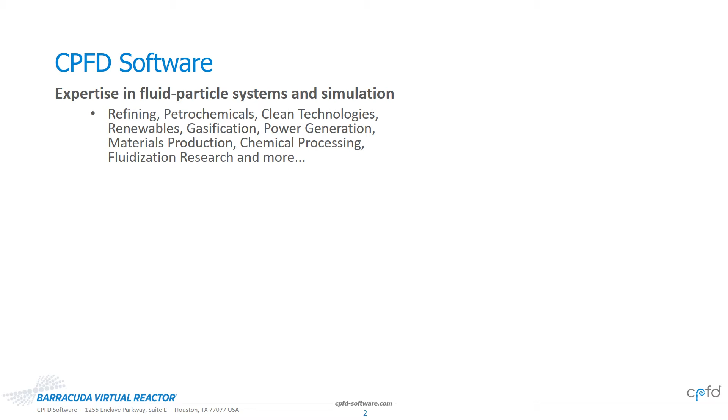Our expertise is codified in a product, a software product named Barracuda Virtual Reactor. Virtual Reactor models the gas particle hydrodynamics, thermal behavior, and chemical reactions in industrial units.

This is award-winning software technology. We have received multiple highly commended designations from the Institution of Chemical Engineers, the IChemE, and most recently won Hydrocarbon Processing's Best Software Technology in the 2020 HP Awards.

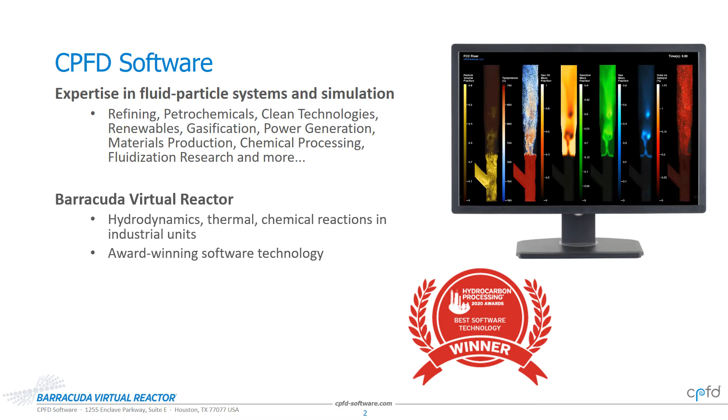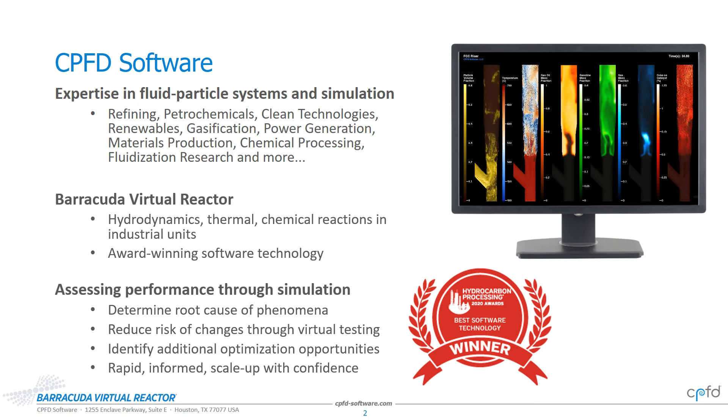And the way it's used is to assess performance through simulation. Like most simulation technologies, it can be used to determine the root cause of the underlying phenomena behind what's happening. But what's really exciting here is this is doing so in units that are typically running 24/7, often for years on end. And so making changes can be extremely costly, and we reduce the risk of those changes through virtual testing. Invariably, what happens is we identify additional optimization opportunities, and ultimately, this enables our clients to do rapid, informed, scale-up technology development, IP protection with confidence.

So, how does simulation speed affect our clients? We're going to talk about speed up. Conventional wisdom, and it's certainly true, is that accelerated simulations, and in our case, GPU accelerated simulations, take less time to complete. Absolutely true. So consider 100x speed up, and we're going to show that and more.

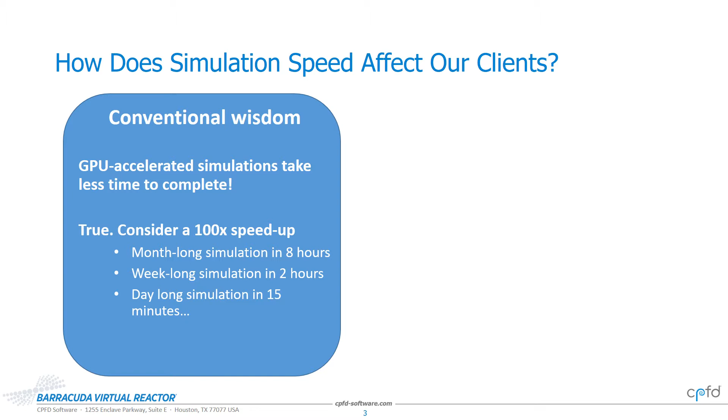What does that mean? Well, it means a month-long simulation's done in 8 hours. A week-long simulation's done in 2 hours, and a day-long simulation takes 15 minutes. And that's certainly true. But practically speaking, with our clients, we've observed something else. Really, a practical outcome that we've observed is that the GPU accelerated simulations are really making the impossible possible.

And to illustrate this, we're going to dig into a case study. This is with a client company of ours, ThermoChem Recovery International USA. We're going to call them TRI for short. They're doing some super exciting things. They have a technology that converts trash, literally municipal solid waste, into jet fuel. And we're going to explore their digitalization journey, which has really been enabled by our GPU acceleration.

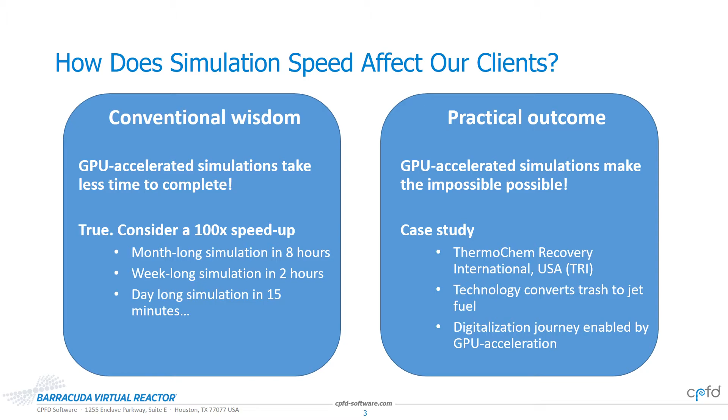Well, let me introduce TRI to you. TRI creates technology that produces green renewable fuels and chemicals from a variety of feedstocks. Here at the bottom, I'm showing various biomass sources. At the top, we have waste that would otherwise be sitting in a landfill.

And TRI's technology, I'd say, is marked by two things, characteristics. One is very high feedstock flexibility, which enables the use of the lowest cost feedstock, not just in terms of dollars, but especially considering the overall environmental footprint when you consider things like transporting the feedstock to the biorefinery. It's also marked by a very high carbon conversion and efficiency. So really, their mission is sustainable economics with minimum overall environmental impact.

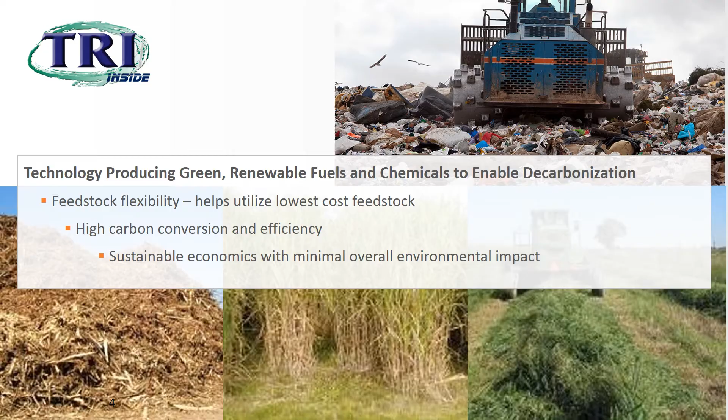And it works. Here are samples of various fuels and other products created using their process, their technology. We have jet fuel, diesel, various waxy products that were created using the woody residuals, as well as municipal solid waste or MSW feedstocks. And these are drop-in fuels for strategic domestic markets.

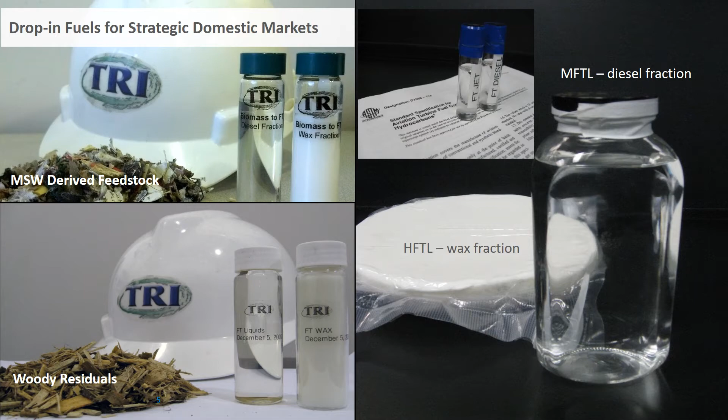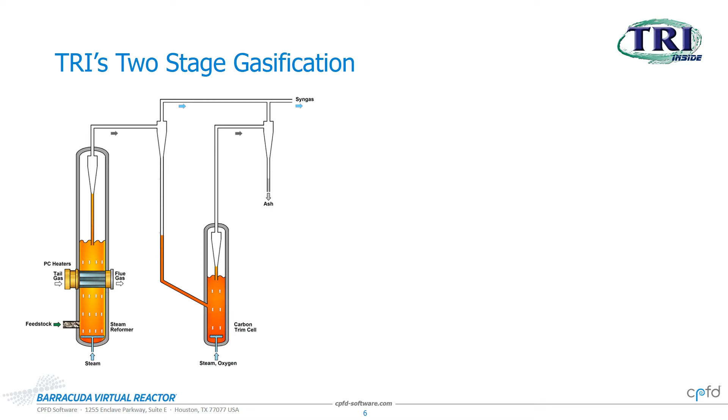On the left I'm showing a deep bed—actually there are two fluidized beds here. On the left is the steam reformer, indirectly heated by a proprietary, unique pulse combustion system. On the right is a carbon trim cell.

This sits in an overall biorefinery process. The entire thing has been demonstrated at a process demonstration unit, or PDU, in North Carolina, including all components: the feed system, the steam reformer, the carbon trim cell, various gas cleanup units (GCUs), and a Fischer-Tropsch synthesis unit.

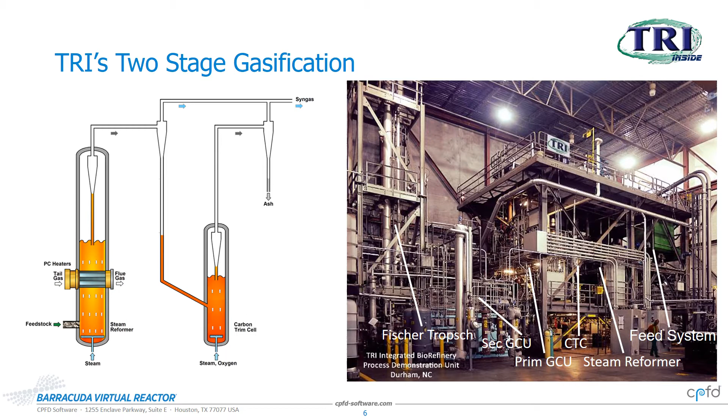So how do you take a unique idea and commercialize it? What are the complexities involved here that would benefit not only from digitalization, but from GPU acceleration of that digitalization?

At the heart of the technology process development here is a digital syngas model. It takes everything from the unit operating conditions—what's the geometry, what are the flow rates through it, temperatures and pressures and so forth—as well as the feedstock properties.

If you're putting wood chips or municipal solid waste into this steam reformer, it'll behave differently. Put that into the syngas model to predict the types of things coming out: what is the syngas composition and flow rate, what's the carbon conversion, the gasification efficiency, and other important engineering parameters?

As we dug into this, we realized there's a lot feeding into this model. It's not 1D, it's 3D, it's multi-phase. So you have the gas-particle hydrodynamics, and it's not just one type of particle—there are bed particles and feed particles, all with different sizes, size distributions, densities, and other material properties.

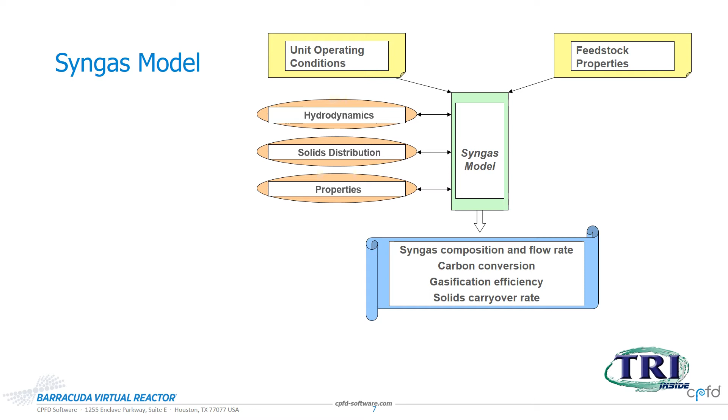Then there's the evolution of that over time: the drying and decomposition, and then the chemical reactions that are happening. How's the thermal changing? What's the transport phenomena?

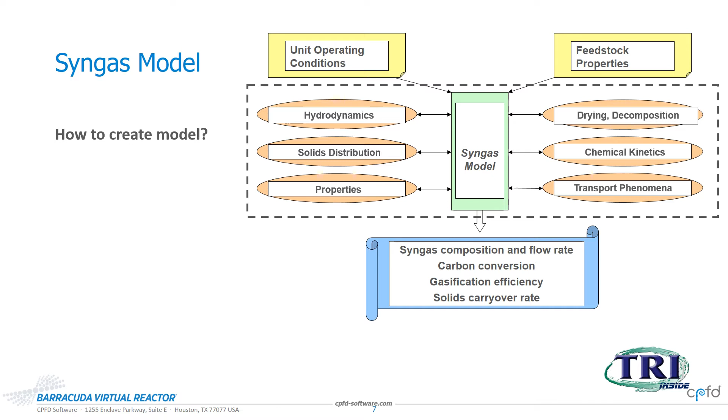So it's a great idea to have such a digital syngas model, but how do you create it? Well, let's start by looking at how engineering is done in the first place. Typically—and certainly this was part of it, necessary but not sufficient here—is a systemic scale-up. You start with small-scale tests, a cold flow unit to determine things like fluidization behavior of particles.

Then you scale that up in terms of the complexity of the chemical reactions and the heat. So a feedstock test reformer, a very small unit, 2.5 kilograms an hour—if I put feedstock A in, what am I getting out, how does it behave? Then scaling that up to a process demonstration unit, as I showed you on the last slide, 4 dry tons per day.

And that's a lot smaller than a commercial unit, which could be 300 dry tons per day or much larger. So what we did here is we...

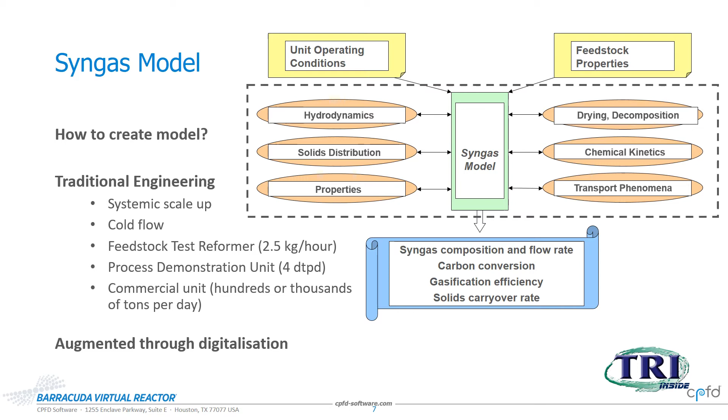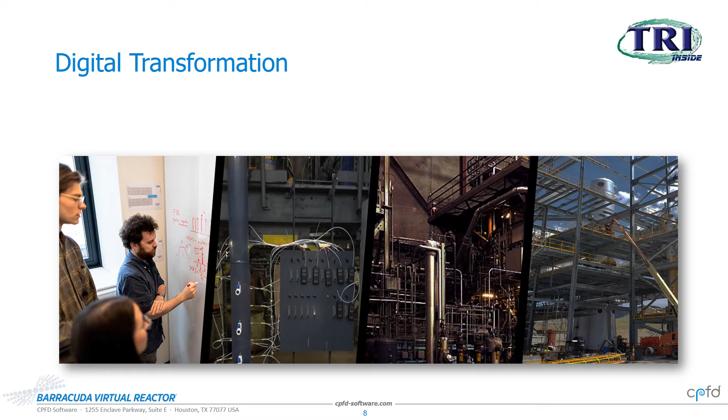took the existing process and augmented it through digitalization. But it wasn't just digitalization—here we experienced true digital transformation. So give me just a moment to talk about something, a buzzword maybe we're hearing a lot about today.

Digital transformation is not just using digitalization technologies in an existing process. Simulating a unit before it's built has been done for a long time, and that is not truly transformative in and of itself. In fact, neither is running a process demonstration unit before running the commercial unit.

It's a step better. Rather, digital transformation occurs when you augment and change the existing processes themselves through the digital technology. So here, we didn't just take it from concept through small-scale tests to process demonstration to large-scale commercial—the flow of information worked both ways.

In some cases we got to a point on one of the larger scales and said, we'd like to augment this model further. And the very experiments that were built were different as a result of using Barracuda and the GPU-accelerated version in this work.

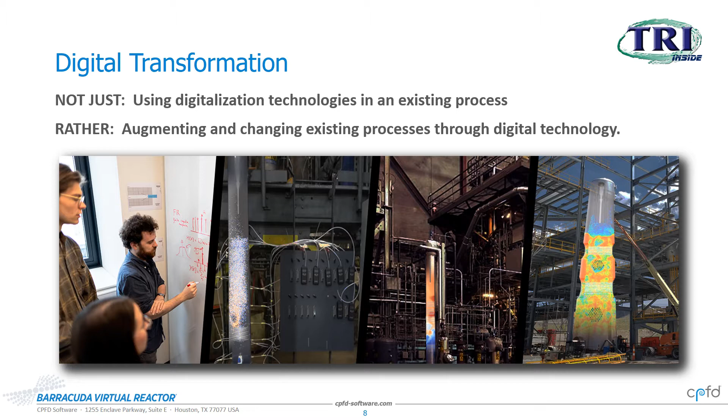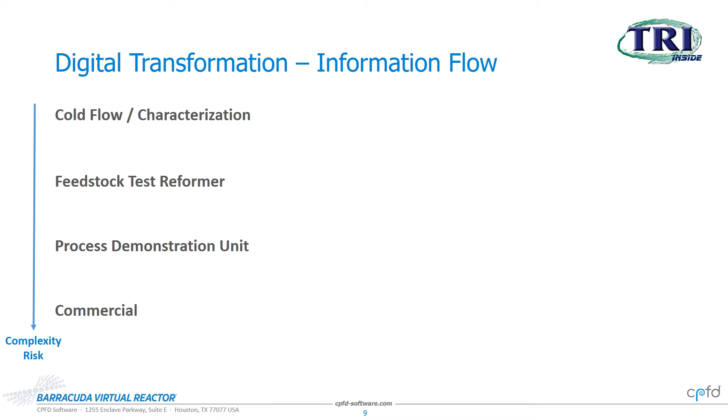Let me illustrate that a slightly different way. So here is your traditional engineering scale-up. As you go down this list, you're going up in complexity—from the cold flow and characterization tests, to the feedstock test reformer, to the larger-scale process demonstration unit, to commercial. This is the traditional information flow in traditional engineering.

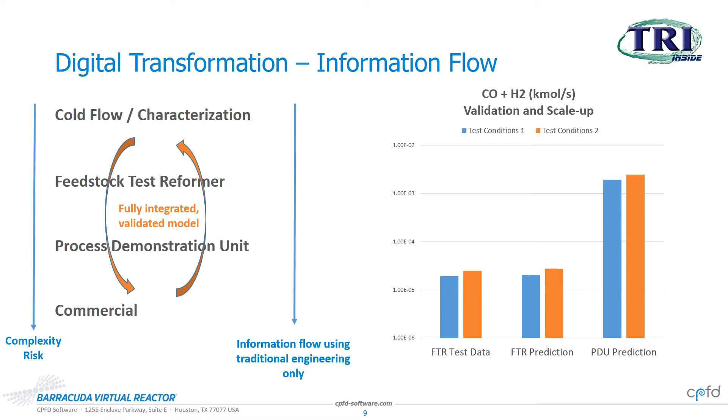That's the traditional engineering workflow, still used even with digitalization. But here, the same fully integrated validated model was used whether moving up in complexity or realizing we have a missing piece of information in one of those submodels. Let's go back and build a new test, creating a truly digitally transformative process and a model that is holistic throughout.

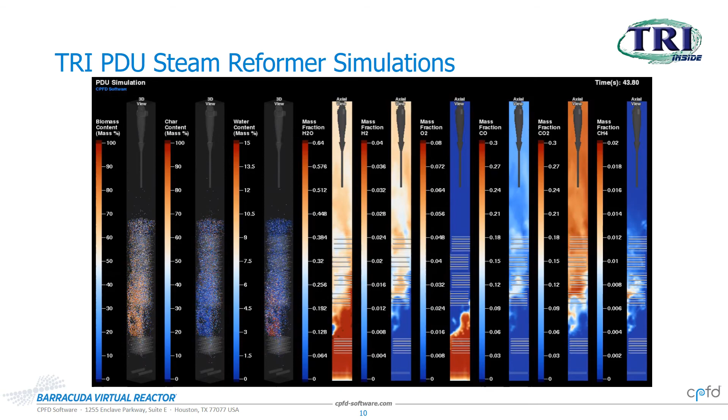These were run at various different feedstocks: black liquor, a byproduct of the pulp and paper industry, forest residuals, your biomass, and municipal solid waste. They're also run at different scales. Recent commercial designs have been simulated at 500, 1,000, and 2,000 dry tons per day feedstock throughput, looking at not just the hydrodynamics and mixing, but the overall prediction of process performance, the outlet gas composition.

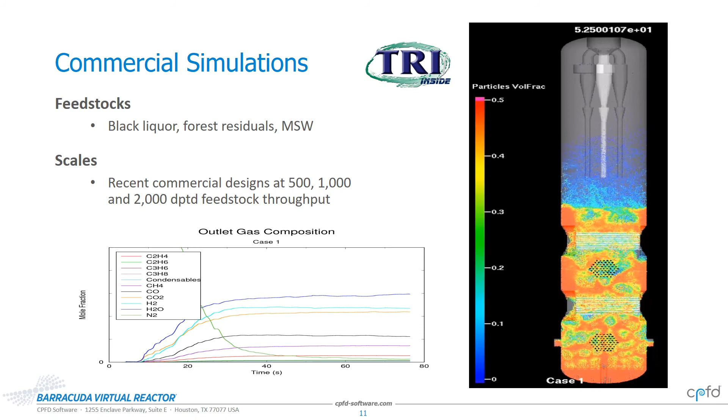In terms of a project update, the most recent iteration of this is Project Sierra, a project by Fulcrum Bioenergy, just outside Reno, Nevada. This is a 500 ton per day facility, and the sustainability of this one's actually quite cool.

It takes municipal solid waste and converts it to jet fuel. The sustainability is really not just in the technology itself, but the close upstream and downstream integration. It's close to one of the largest landfills in the United States, and the supply chain is integrated upstream and downstream—obtaining the waste from waste management, offloading the product, the fuel, to Marathon Petroleum, a variety of airlines, the U.S. Navy and Air Force.

This is a snapshot of work in progress. The digital transformation is ongoing here. There's software and technology improvements, and my colleague Andrew is going to speak about that in just a moment in terms of the speed up we've seen, are seeing, and will see soon based on what we're doing. Beyond just the speed aspect, there's other aspects we're exploring in our R&D, whether it's involving AI, big data, machine learning. Is this one going to go to real-time process control? Lots of exciting things happening.

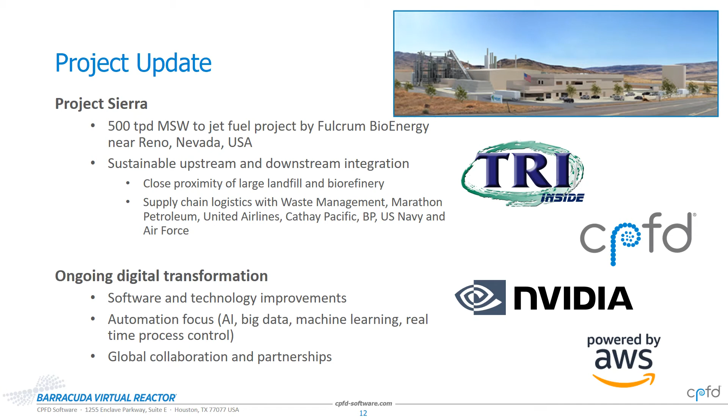Yes, hello. My name is Andrew Larson. I'm a lead software engineer here at CPFD Software, and I specialize in GPU acceleration. Specifically, we use the CUDA framework to accelerate our computer-aided engineering software.

Thanks for that introduction, Peter. Peter talked a lot about why we should care, what engineers are doing with our software, the industrial scale and the nature of the problems we're trying to solve. What I'd like to do is take a step lower and talk about the technical details of what's in our solver, the acceleration process, and the challenges we face when accelerating this code. We're taking a step back to look at where we were in 2009, then ten years from now, and a bit further into the future. But to appreciate what we're working on, we can talk through where the code has been.

In 2009, when we were doing one simulation second per day, this was on a serial code run on a single CPU core, with the clock speeds available at the time. Just in the brief here, we can see there's a big change in the last 10 years, and we're now able to simulate 68 simulation seconds a day. That's a huge difference for the engineers trying to solve these hard problems.

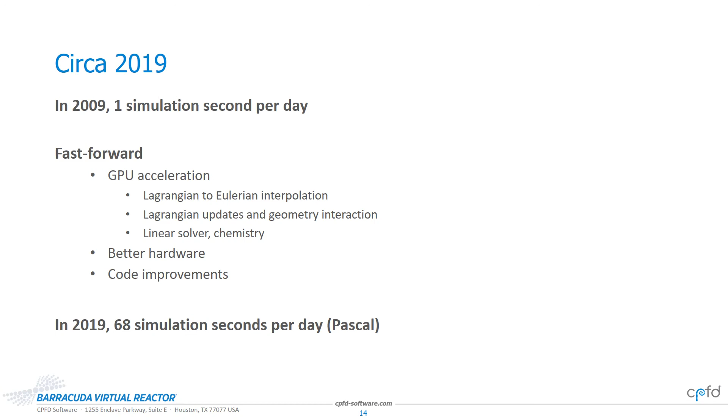Moving to this particular case study from TRI, we're looking at what was happening in 2009. We were getting 1 simulation second a day on a single CPU with Barracuda Virtual Reactor version 14. As we move through time, just with CPU hardware improvements, it goes to 2 simulation seconds a day with version 15. As we then add different areas of GPU acceleration...

First, we did the linear solver, and we're getting 10 seconds a day with version 16. Then we move to parallelizing all the particle operations and most of the fluid calculations. As we add more acceleration to more parts of the code, we have to work our way through this flat profile. With version 17.3, we're seeing even more gains, getting 29 seconds a day.

At that point in time, years later, the bottleneck that came up was chemistry. The first step was to parallelize it on the CPU side with OpenMP, and we got gains. Then we took it a step further with version 17.4, putting the chemistry on the GPU and getting even more speedup.

Through that 10 years, we had hardware improvement and we consistently worked our way through the code, taking what was simply serial and pushing it over to parallel, having to address not just a linear solver, but how do we do interpolation, how do we do chemistry, how do we take each separate piece and accelerate it.

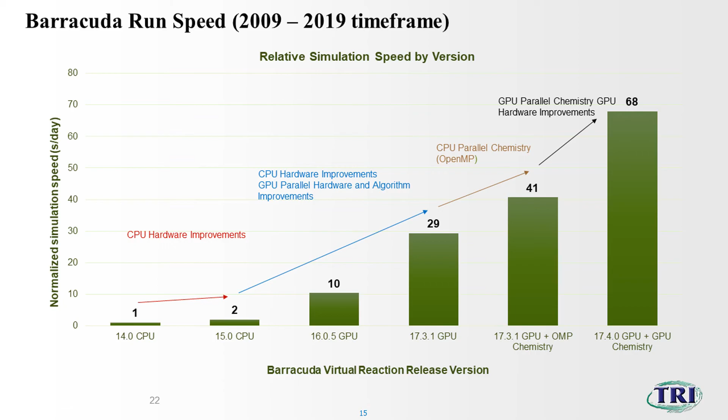And it's now 2021, so there's another 2 years here, and I've been spending a lot of my time working on adding multi-GPU acceleration to the solver. I wanted to give you a little taste of the size of the problems we're working with, or the type of problems.

We're looking at a circulating fluidized bed combustor, and fluidized catalytic cracking regenerators. When we're doing these simulations, we want to scale the problem for you here. We're talking about 10 to 20 million discrete particles that we're running in one of these calculations, and cell counts that range from 100,000 to 800,000. And of course, we can do more.

That kind of frames up the challenges in the code and the size of the problems we're running. Now we have our 2019 runs at 68 seconds per day, and we're looking at what we did in the last 2 years adding multi-GPU acceleration to our code, and what sort of speedups we're getting.

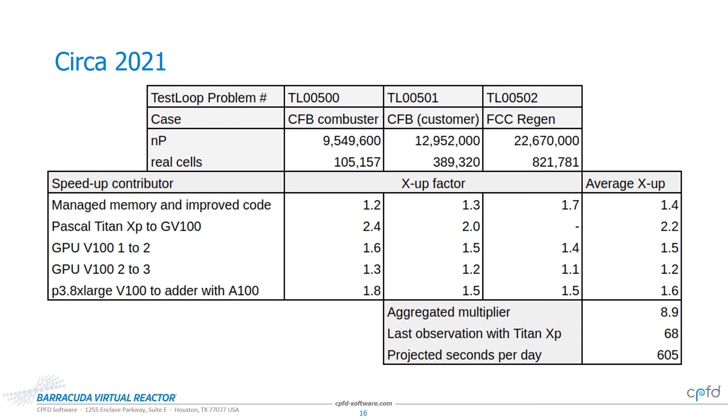If we're looking at just improving the code, using CUDA managed memory to do this, adding a single GV100 and changing it to 2, using newer hardware moving from Pascal to Volta, adding a third GPU, and all the other hardware improvement that's happened in the last 2 years — if we add up all these, we're looking at an increase in simulation speed going from 68 seconds a day to 605 seconds a day.

We're looking at something that's 600 simulation seconds a day. This changes what these engineers would be able to do, look at, and explore in terms of their space to improve these industrial scale systems so that they're running correctly, emissions are lower, and so on.

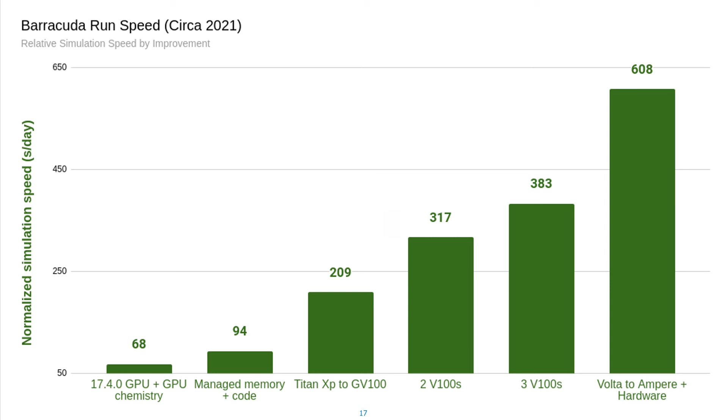That's where we're going to be this year, and of course we're not going to stop there. There's still plenty of work to do. Looking forward, in the next year we're looking at doing other improvements. Top of the list: currently our linear solver is still restricted to a single GPU. That'll be one of the first things we address.

We expect to get about 10% improvement there. We're going to reduce memory transfers for another 5%. This together, and other small fixes, are going to provide us better scaling from 2 to 3 GPUs.

We have new hardware to look at with the Ampere series NVIDIA GPUs. Putting this together and taking out some of the bottlenecks, we'd expect to see better scaling from each GPU that's added, where typically we're able to get maybe 1.5x now. As we move forward, the scaling is going to get better as we remove bottlenecks and fix areas where the code is not efficient.

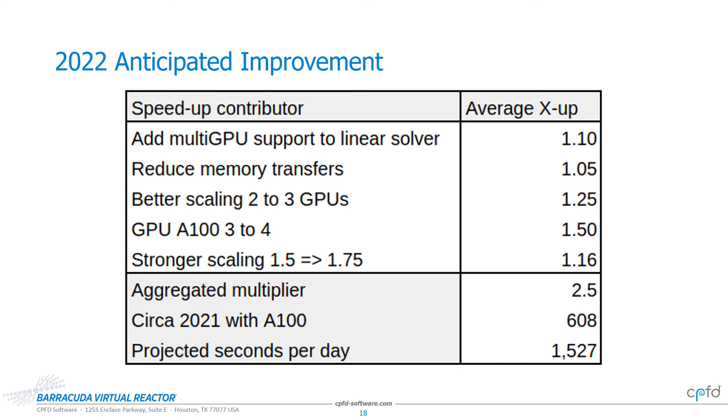We were at 1 second a day 12 years ago. We were at 68 seconds 2 years ago. We're at 600 seconds today. And if we take these further improvements, we're doing another 2x improvement here where we put on the linear solver, fix things up, get better scaling, get new hardware, add another GPU, and we could be looking at running 1,500 seconds a day next year.

It really opens up what is possible, right? We're able to take these month-long simulations and bring them down to an hour maybe. And then what happens is it really enables these process engineers, these people trying to design very complicated industrial systems, to be able to iterate maybe on a daily basis and explore the design space or problem space much more quickly.

A lot of what you see is, okay, we use GPUs and multiple GPUs, and it's this much faster for this algorithm, and this much faster in this case. Here we're trying to take a step back and look at what has happened in the last 10 to 12 years that has really changed what we're able to do collectively in the application area, and enable people to really look at this stuff more virtually. We're able to simulate it, and simulate it very quickly, so we can get the information we need to make good decisions.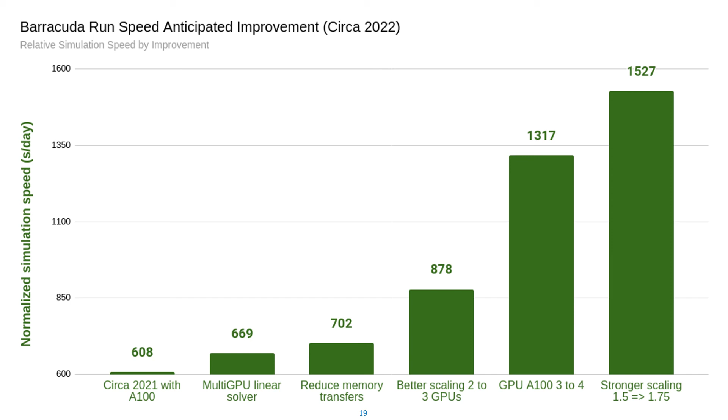All right, we'll now turn it back to you, Peter. Well, thanks, Andrew. The speed's incredible, and we see it impacting all the industries that we serve. But more than that, we're seeing a shift, and really it's enabling newer sustainability technologies and applications that previously have been intractable. This is possible by our own investment into R&D, and also by a lot of the awesome technologies put out by NVIDIA. Year after year, I'm amazed at the speedups we're seeing, and able to take advantage of by working together.

In terms of what we're looking at with the sustainability applications, we went through the one case study, the waste to fuels through TRI. There's a lot of other things going on: waste to energy, waste to chemicals, biofuels applications.

Here's a really cool one. If you've not looked into the circular economy of plastics, look up terms like advanced recycling or chemical recycling. This is not just traditional recycling. Traditional recycling is essentially melting and extruding plastics and using it again a few times. The challenges there are the product quality degrades fairly quickly, and the impurities really make much of the recyclable plastics you throw in the bin not actually get recycled because they're too contaminated. With advanced or chemical recycling, these plastics are ground up and used as feedstock right back into a reactor, making the basic molecules and rebuilding the plastics in the first place, which allows for an infinite recycling loop, much more broadly able to handle a wide range of impurities.

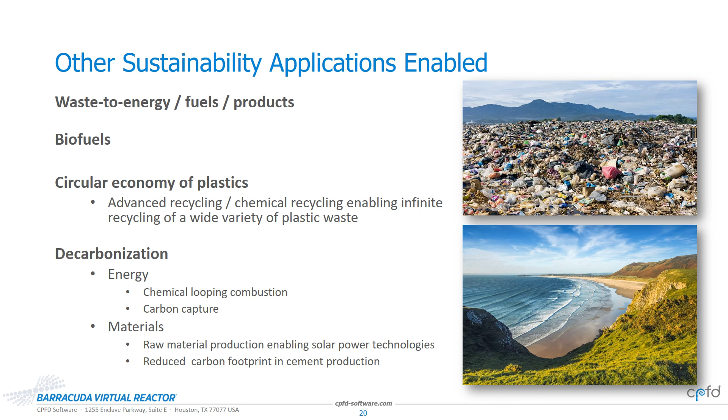So in summary, what we're seeing with Barracuda Virtual Reactor on NVIDIA GPU technology is that problems that were previously not possible to solve are now solved regularly in industrially relevant timescales, and this enables sustainability technologies that are changing our planet for the better.